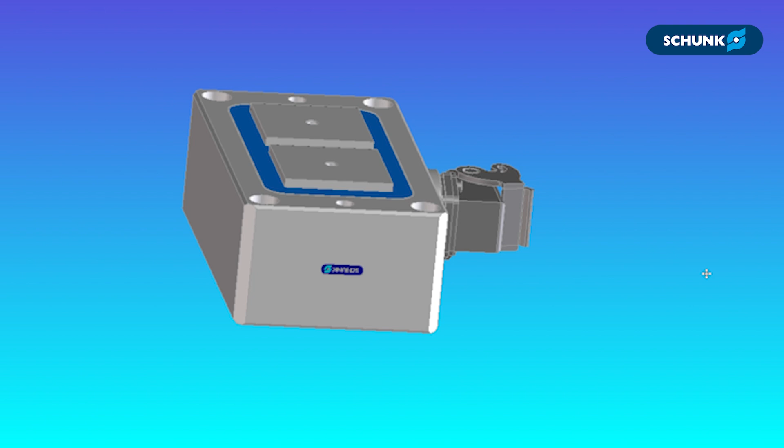Magnetic grippers are constructed with a north pole and a south pole, which you can see here in this bipole magnet. Magnetic flux flows between the north and south, and when the metal part is placed on the magnet, the part becomes a part of the magnetic circuit. With magnetic gripping, the metal thickness determines the magnet used. The thickness of the metal is the first thing to know when choosing a magnet gripper.

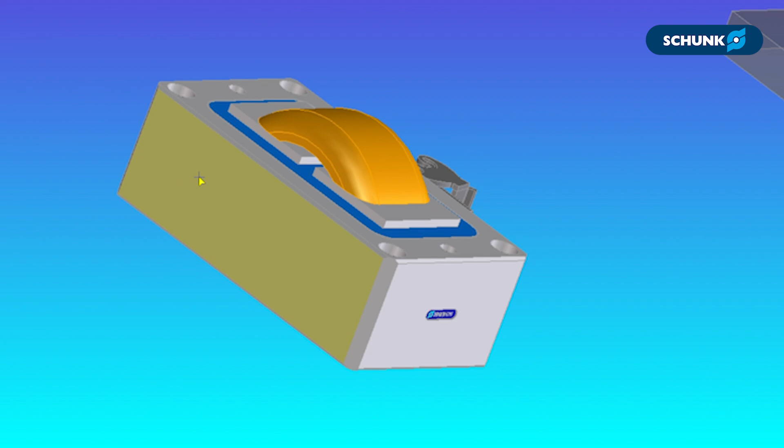Here's why. Flux is invisible, but if you could see it, it would look like this. Notice the flux goes from north to south directly and is very concentrated. This is important because the size of the pole determines how deep the flux goes into the part. The bigger the poles, the deeper the flux goes into the part.

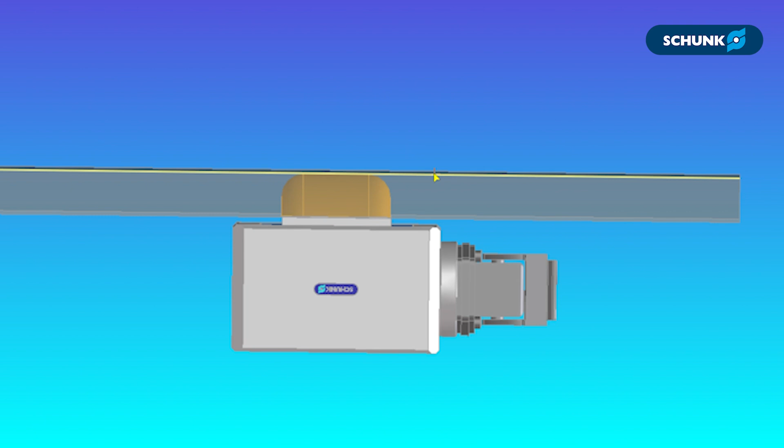Now let's look at how this relates to the workpiece. This is an image of a magnet holding a part. Notice that the metal thickness and the flux depth are the same, meaning the magnet is clamping with full strength. Since we're experimenting, let's see if bigger is better. Let's take a look at how a bigger magnet will work on this plate.

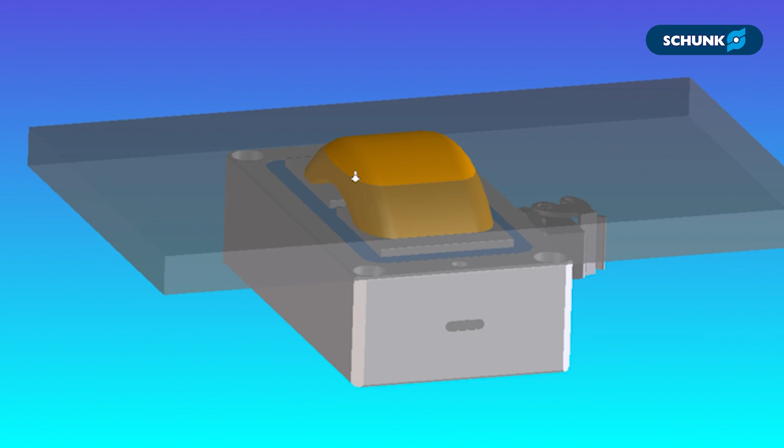This image is of the same steel plate with a bigger magnet. Notice the flux radiates outside the part. This reduces the clamping force available from the magnet, and the magnet could pick up two parts instead of one, known as a double pick. Can you now see that bigger is not always better? So if bigger isn't always better, how are large, thin steel sheets handled with magnets?

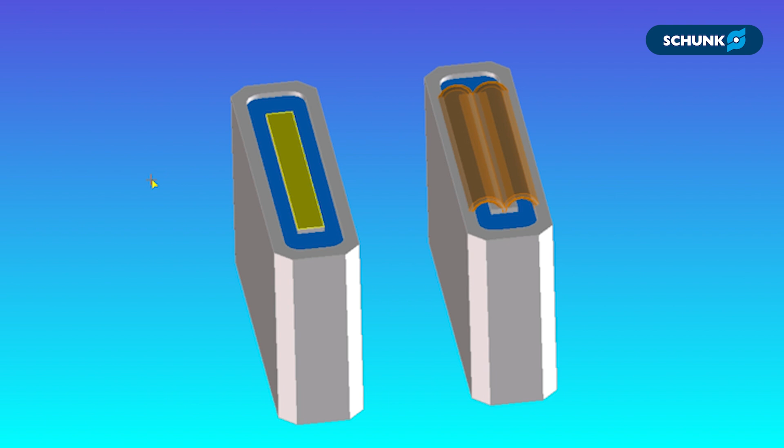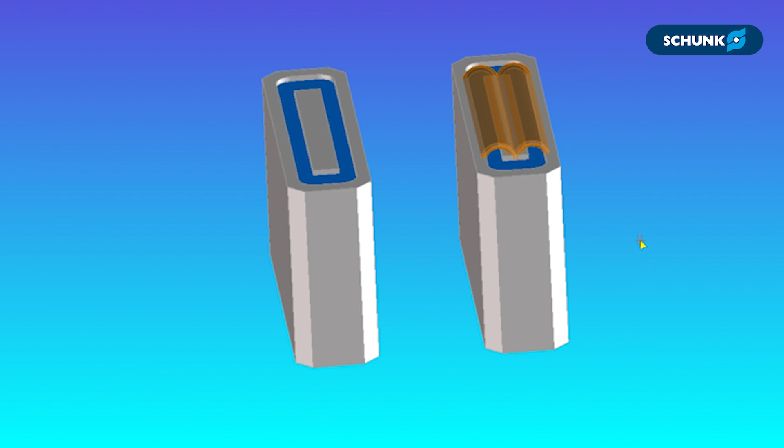Remember when I said the size of the magnet pole determines the depth of flux? Is it possible to handle thin metal and still have good clamping force? Yes, it is possible with this type of magnet called a monopole magnet. The center strip is the north pole and the body is the south pole, reducing the size of the poles and creating a short flux band. We have several types of monopole magnets, which are very strong for their size.

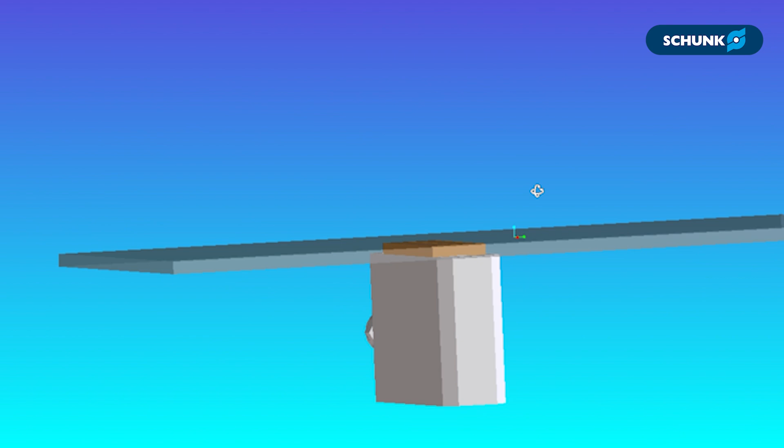This magnet shows the correct magnet for this thin part, which has smaller poles. Because this magnet can now work at full strength, it proves that bigger isn't always better. In cases like this, 2 or 3 smaller magnets will outperform one large magnet.

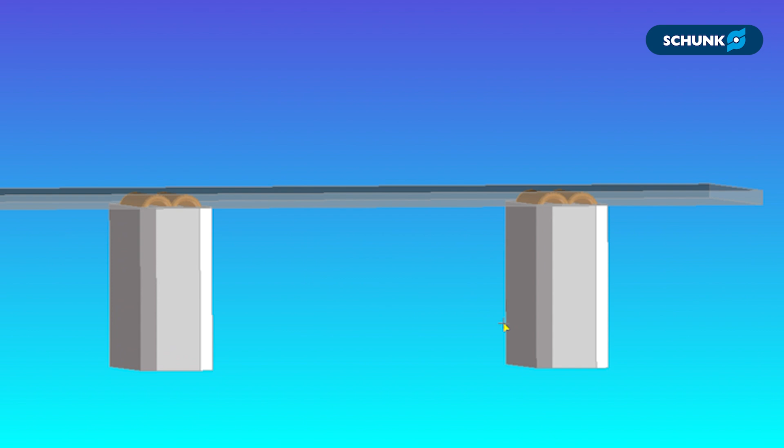Just to prove that bigger isn't always better one more time, see what happens when we use a big magnet on this same thin sheet. There is barely any metal for the flux to hold on to, and much of the flux is wasted. Not to mention that this magnet could now double, triple, or quadruple pick parts, which is really bad.

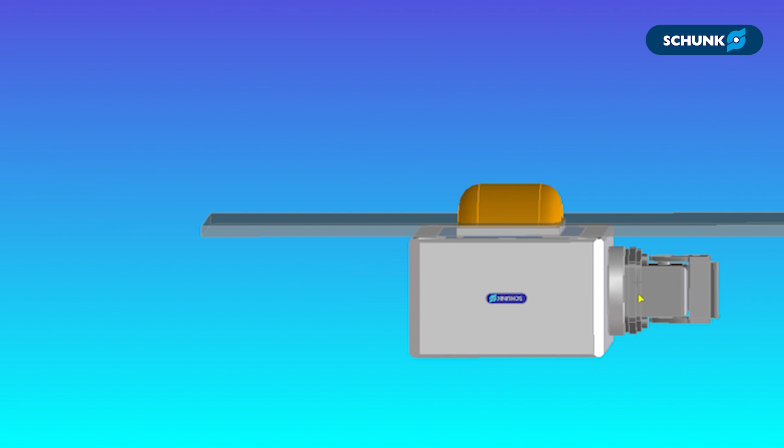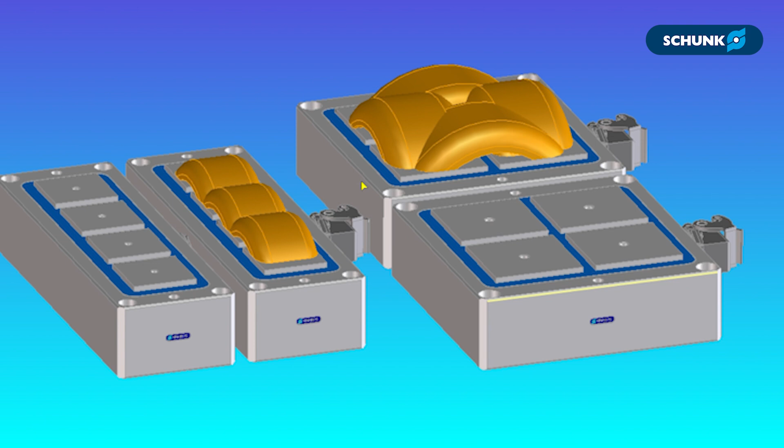As parts get larger and heavier, larger magnets with more capacity are needed. Shown here are 2 other configurations that have 4 poles in a line and 4 poles in a square. These are the most powerful magnets, which have a payload capacity of hundreds of kilograms. Like before, flux is invisible, but if you could see it, this is what the pattern would look like.